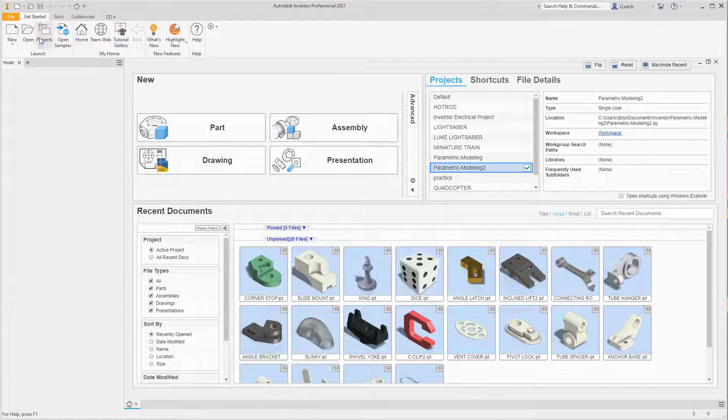Turned out kind of neat. Anyway, I'm digressing, so I'm going to do the switch base. I'm going to go to new, go to my standard English templates, hit the create button, and start my 2D sketch on the XY plane.

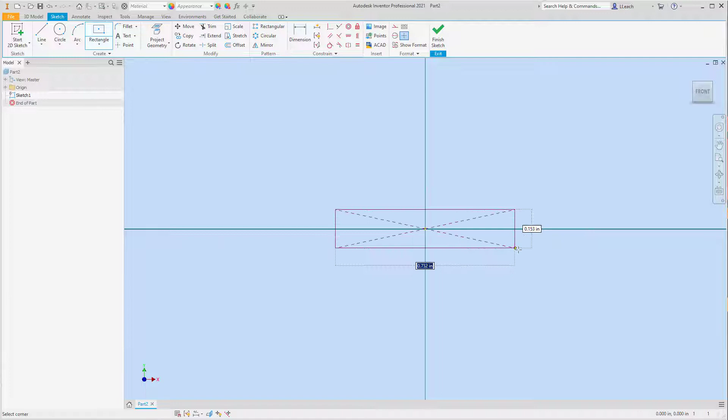First I'm going to create that back solid piece. I'm going to start with a rectangle, 2-point center, click the center dot, drag it out. That back piece has a width of 7, and then the height of that back piece is 3.25. Press enter.

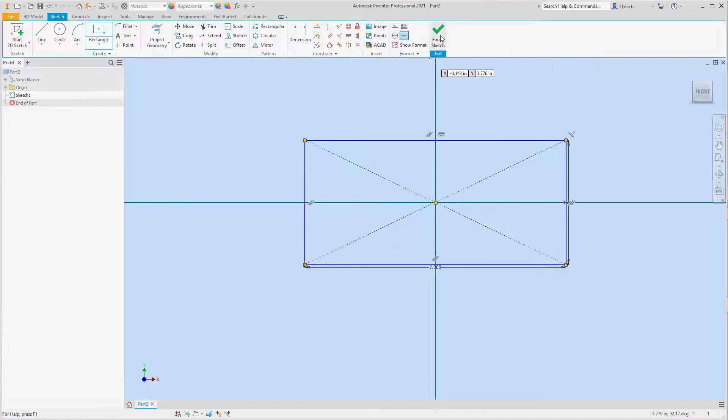Zoom out a little bit. So there's that, I'm going to finish my sketch. I'm going to extrude this symmetrically in both directions by 1 is the thickness. So that's already set for 1. I'm going to hit OK here.

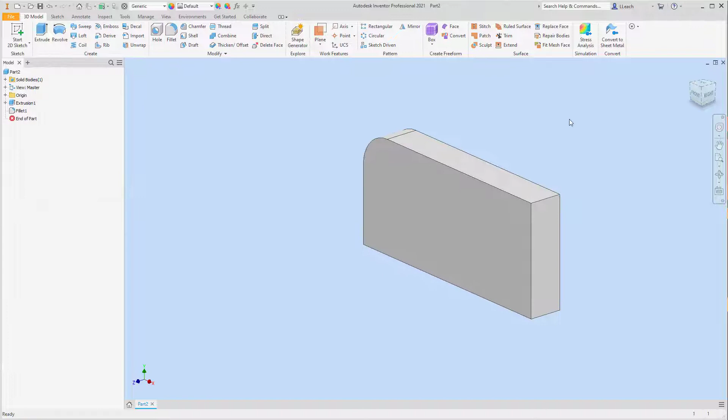Then I'm going to just start doing what looks easy to me. So the first thing that looks easy to do is the fillet on this back corner. That has a radius of 1. I'm going to select this back edge, round that off, hit apply, and then there's 2 circles on this face here, so I'm going to start a 2D sketch on this front face.

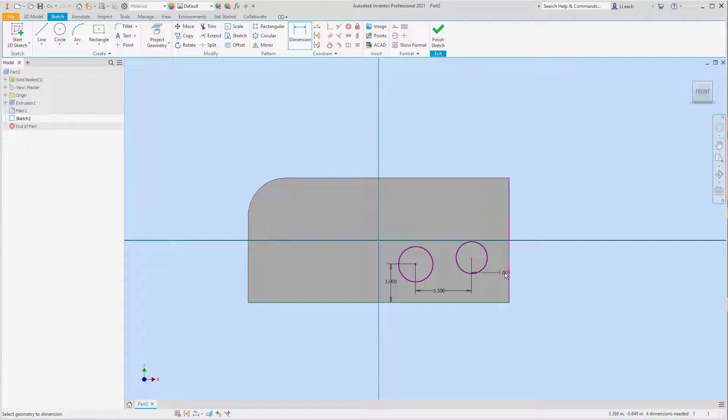I'm just going to draw 2 random circles here, uno, dos. I'm going to dimension this one, the center of this to the bottom, that is 1 inch, and then the center of this one to the center of this one is 1.5, and then the center of this one to this edge here is 1.

Kind of close. Then the diameter of this one is, or actually the diameter of both of those is 0.75. I'm going to click the equal constraint. I'm going to select this first, this circle, and then this one, so now they're both the same diameter.

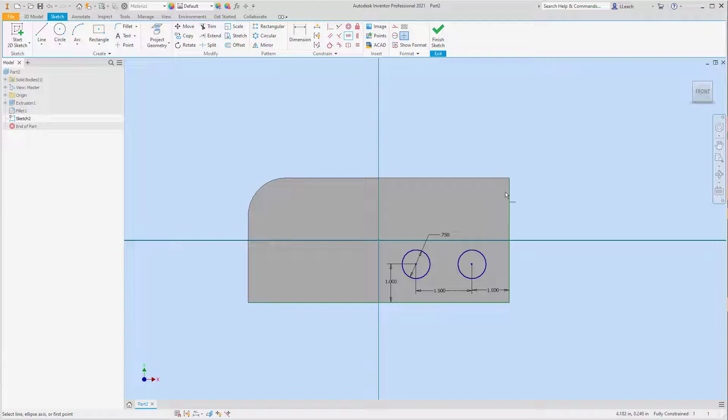And then to line this one up in line with that one, I'm going to click on this horizontal constraint. Select the center point here of this one first, and then this one second. I don't think it really matters because I have this dimension, so that one's going to move to there. Anyway, so click that one, and they're both lined up. And then I'm going to finish my sketch.

I'm going to extrude both of these circles, cut, and then all the way through. Okay, so that's the easy part on there.

So the challenging part, I think, is going to be cutting out this void shape here. To do that, I'm going to start my sketch on this plane here. And then I'm just going to sketch out what I know, so I'm going to project geometry. I'm going to project this top line and the right side line here. I'm going to draw a line kind of from here, randomly down a little bit, straight down and over to the right, straight over to the right.

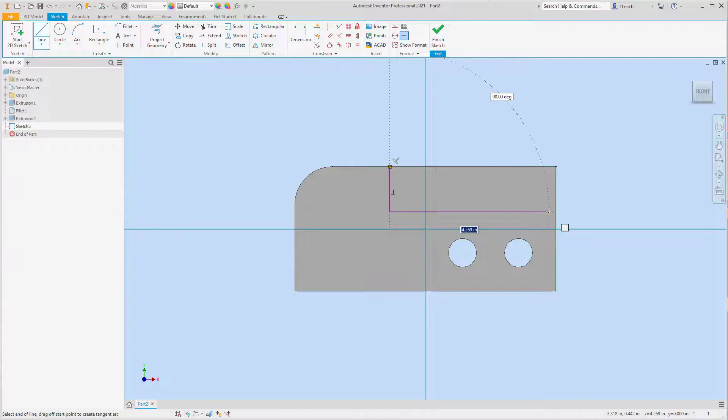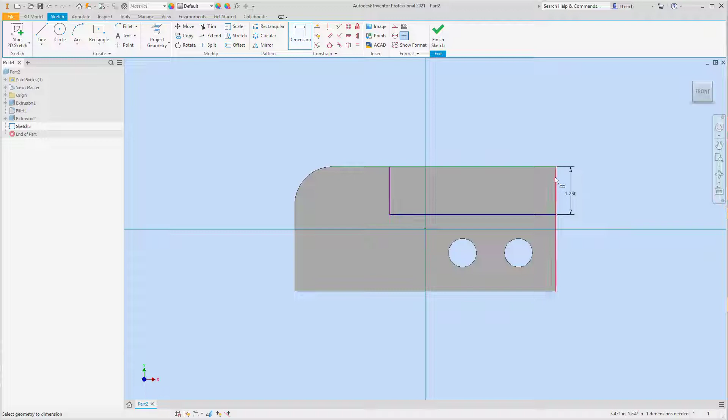I'm going to dimension, let's see what I know. So from here to here, that is 1.25. And then from here to this line is 4. So that's what I know so far. And then I know there's a radius here of 1.

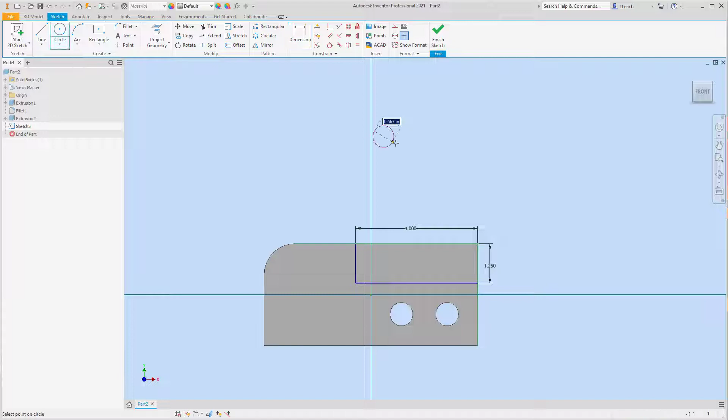So what I'm going to do is I'm going to draw a circle up here, circle center point. So I know it has a radius of 1, so I'm going to be lazy, I'm just going to say it has a diameter of 2.

And then I know that the quadrant of the circle is in line with this line over here on the left. And then I know that the center of that circle is going to be in line with the top of my object here. So I'm going to use the tangent constraint, and I'm going to click on this line, and click on the side of the circle here, and those are lined up.

Then I'm going to use the horizontal constraint, so I'm going to click on this line here. Wait, that one's already lined up, isn't it? So what I could do, I'm going to use the coincident constraint here.

I'm going to click on this line, click on the center dot, and that moves it down. So that's one part. And then there's another radius that's 5, so I'm going to make another circle.

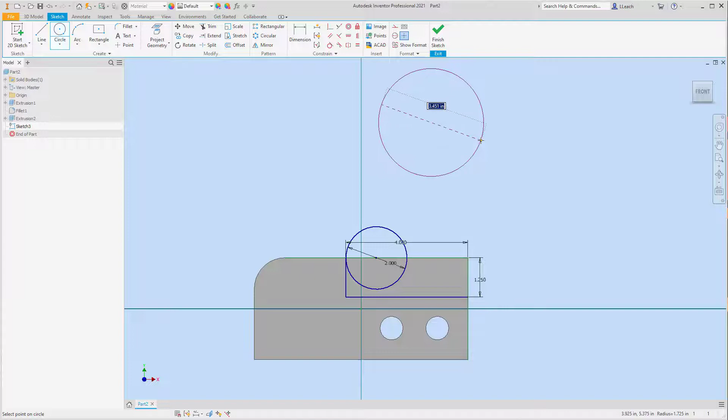So if my radius is 5, my diameter is going to be 10. And now it's a huge circle. Let me move this over a little bit.

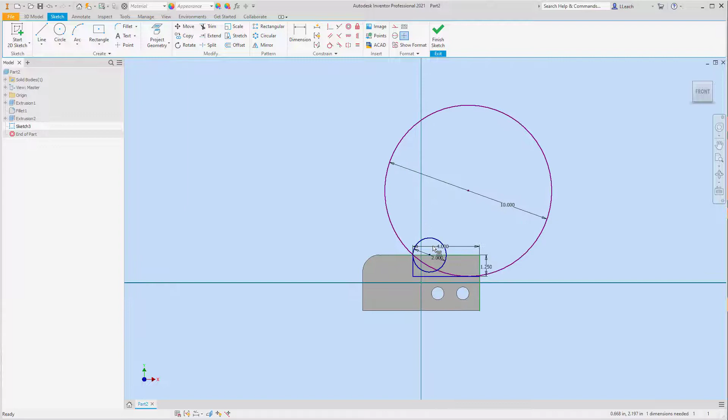So I know that the tangent of the quadrant here, this circle and this line, is going to be tangent. So then what I need to do is move this over to where this curve and that curve kind of meet. It kind of looks something like that.

So what I want to do is move this kind of way off for now. I'm going to use the tangent constraint, and I'm just going to click both circles here. And that kind of lines those up the way I need.

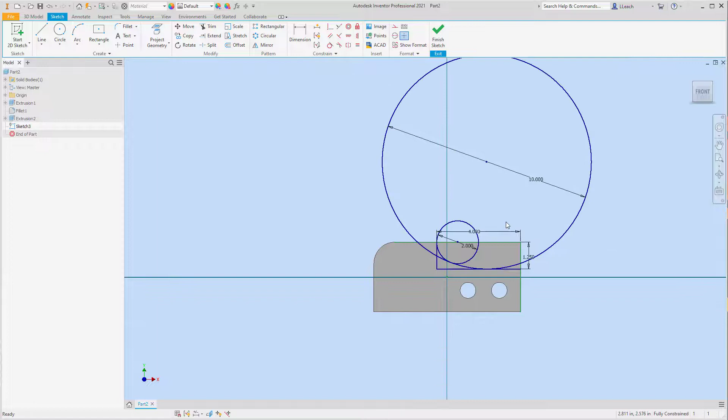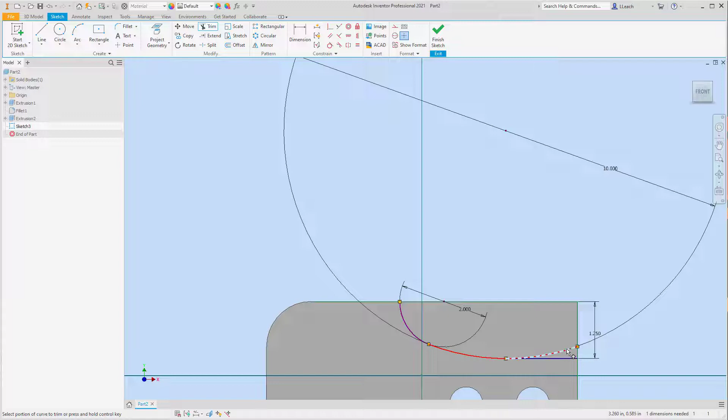And then I'm just going to trim out the part that I don't need. I don't need this big old honking circle up here, or that part of the circle. I don't need that, or that, or that, or that part because it's going to curve down straight. I don't need this piece. I think I got everything. That's kind of what we're left with.

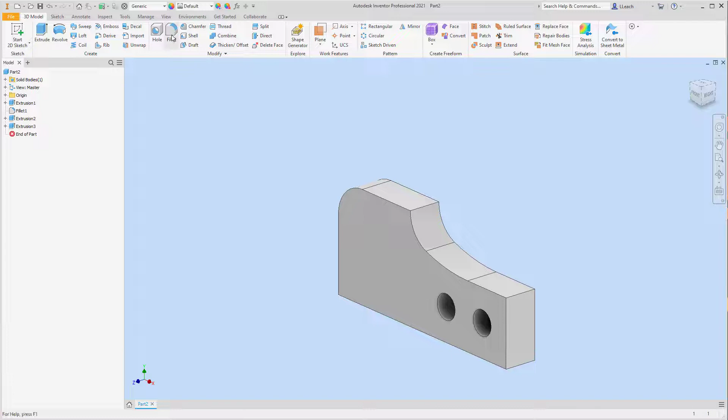So I'm going to hit finish sketch. I'm going to extrude, cut this all the way through, hit OK. So there we go. And then I'm also going to fillet this edge here, which is 0.5 for that radius. Click this edge here, boom. So there's that back solid piece.

And then all we need to do is create this one that sits in front and underneath it, so let's get busy on that. To create the front part, I'm going to start a 2D sketch on this face right here.

I'm going to draw a rectangle using a 2-point. I'm going to start this thing on this line, and drag it down and over just a little bit below it, like so.

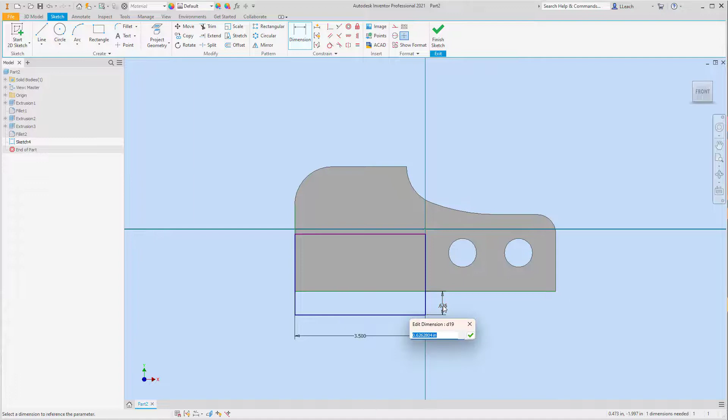And then I need to add some dimensions. I'm going to dimension this to here, that is 3.5. And then from here down to there, that is 0.75. And then from here to here is 1.75, like so.

Then what I could do is draw this angled line here, from here to there actually. And then dimension from this corner to this edge, that's 2.75.

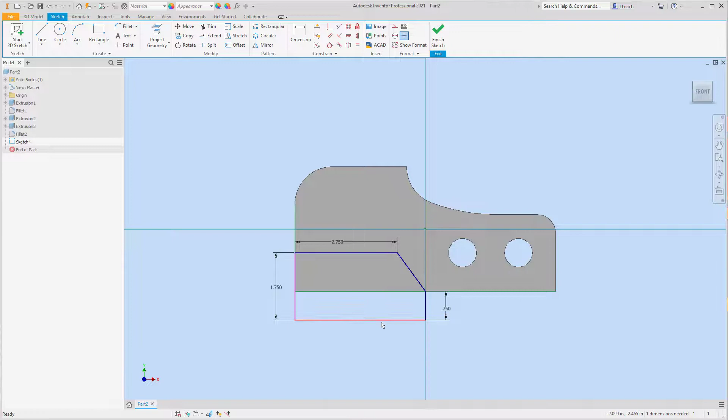And then I'm just going to trim this piece. Let me get rid of this line here. And then I'm just going to draw a line from here to here, like so. I think we're good there, yeah, I'm going to finish my sketch.

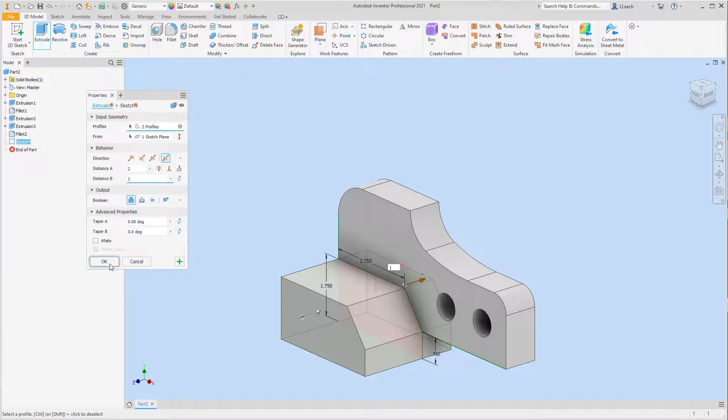I'm going to extrude this asymmetric. So this and this, it's going to come out this side, towards us, that's going to be 2 inches. And then it's going to go back, and that is 1 inch back the other way, like so. And then I'm going to hit OK there.

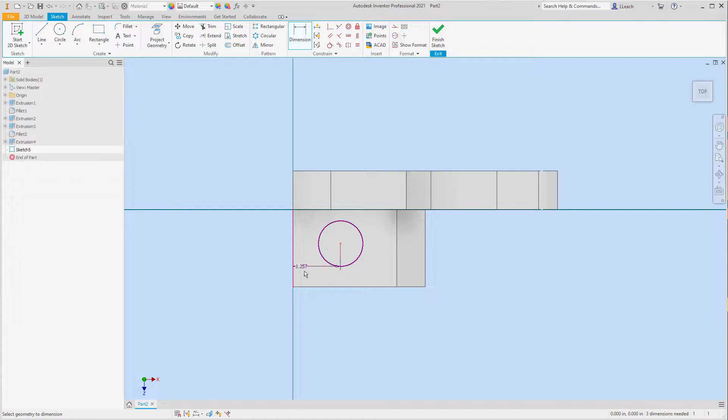Then I need to put a hole on top. Start a 2D sketch up here, I'm going to rotate it around like that. Just draw a random circle here. I need to dimension the center of that, from here to this side is, what is that, 1.25? And then from here, center to the bottom is 1.

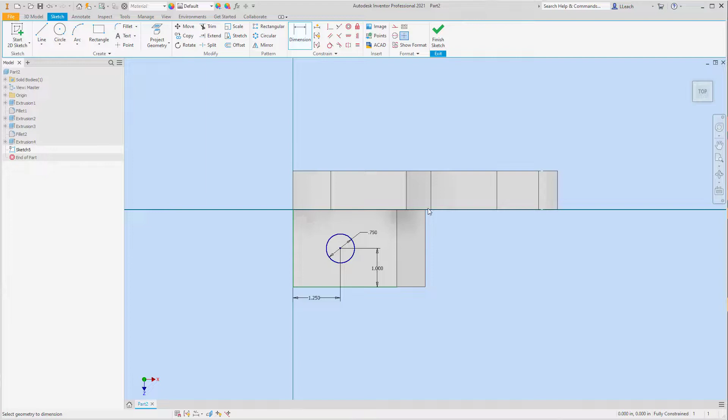The diameter of this circle is 0.75. And then I'm going to finish my sketch. I'm going to extrude, cut all the way through there. And then I just need to angle this edge here off.

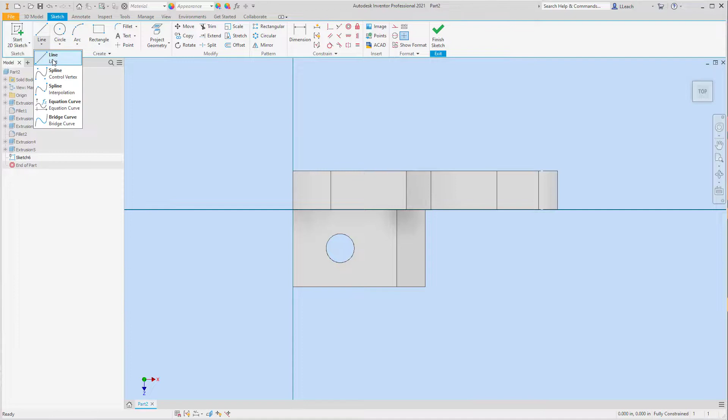So what I'm going to do is start my sketch on this top face. I'll rotate it around again. I'm going to draw a line from here over to the edge, basically just making a random triangle here. And now let me dimension my random triangle.

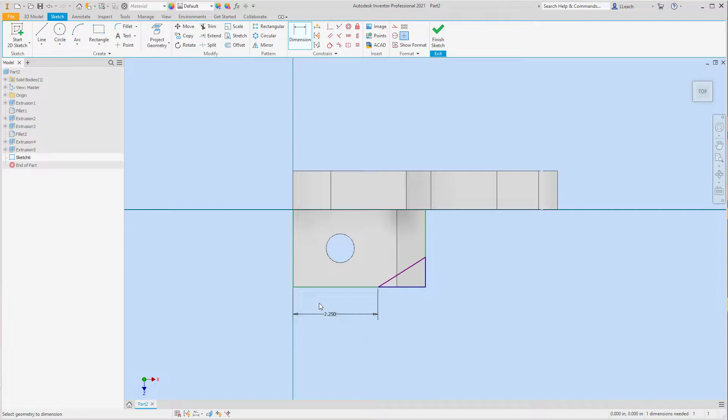From here back to here, that's 2.25. And then this angle from here to here, it tells me that that's 30. Wasn't too far off. So yeah, that's all I need.

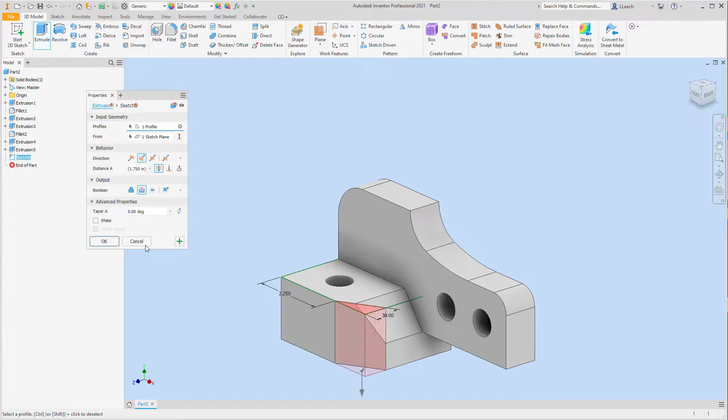So then I can finish my sketch. I'm going to extrude, cut that all the way through so it slices down. And so there's that, I think we've got everything right there.

So I'm just going to click on Shaded with Edges, click Shadows, Reflections. I'm going to change this to Photo Booth. And for the color, I'm going to make this smooth, my usual smooth ivory. Click on the home, so it's kind of nice and centered there. And I'm just going to save this, save it as Switch Base.

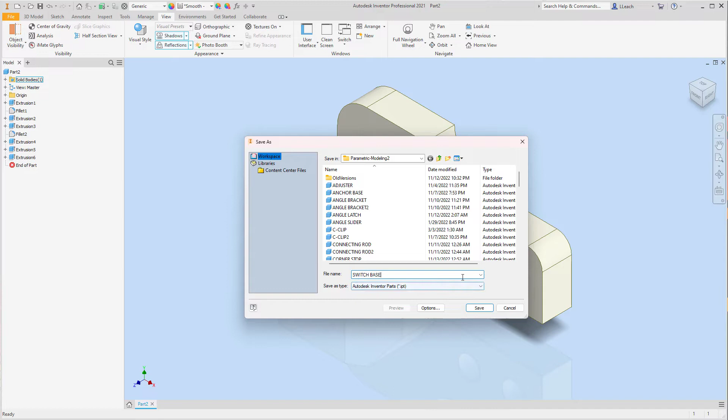There we go. So yeah, we're starting to get to some parts that are a little bit more challenging, but we're going to get them. So there we go, all nice and neat there.